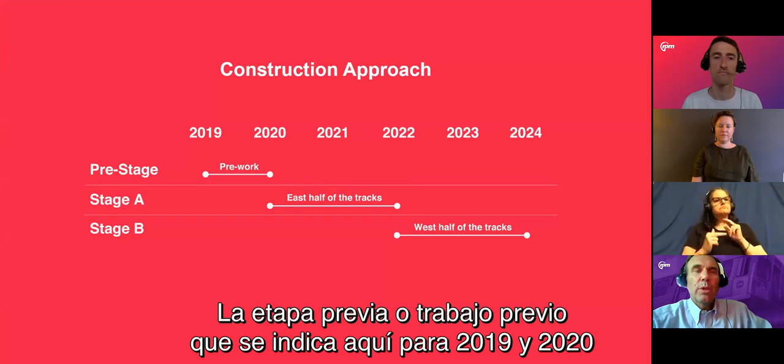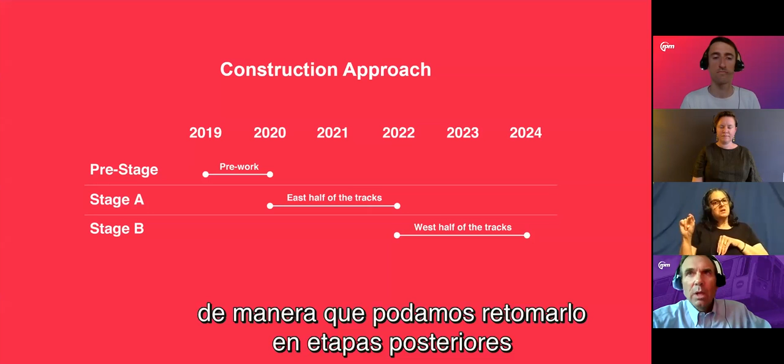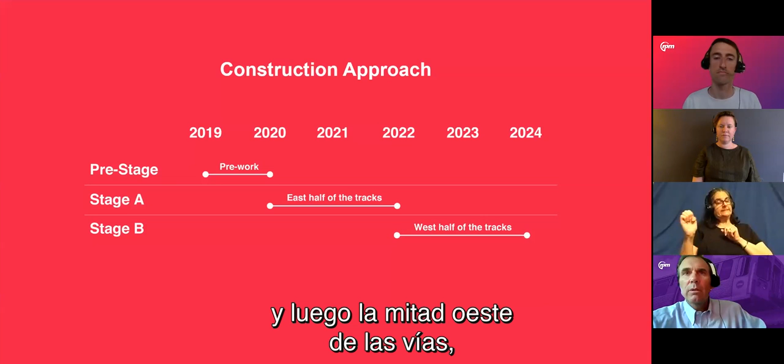Next slide, please. So construction approach and schedule. The pre-stage or pre-work indicated here for 2019 and 2020 is really to set up the tracks in such a way that we can come in two subsequent stages and build half of the new structure and stations on the east half of the tracks from 2020 through 2022, and then subsequently the west half of the tracks once the east half is done and we can run service on them.

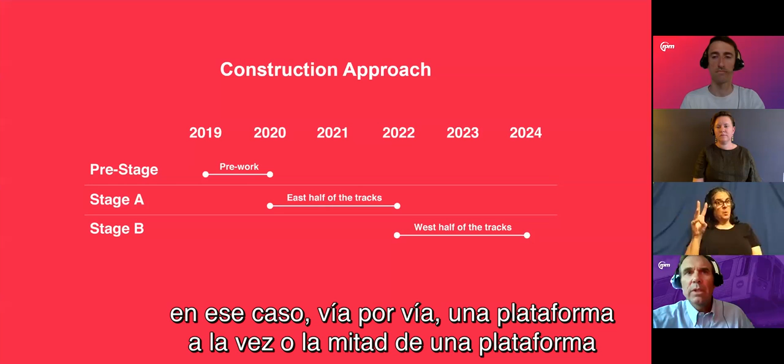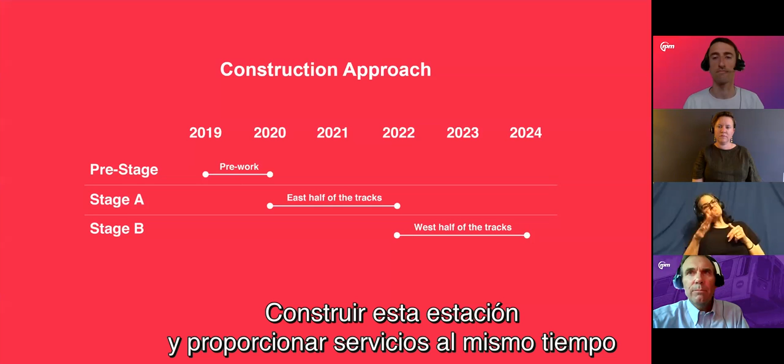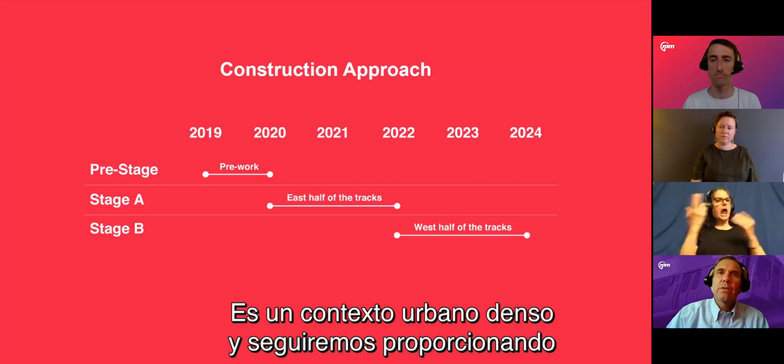So if those of you that watched Wilson noticed how we built, in that case, one track at a time, or one platform at a time, or even half a platform at a time, you'll see a similarly incremental process here. It's really to build this station while we're also providing service, which is one of the reasons for the cost of the project, and one of the reasons for the duration of this schedule. It is a dense urban context, and we will continue to provide the same level of transit service to you throughout the construction.

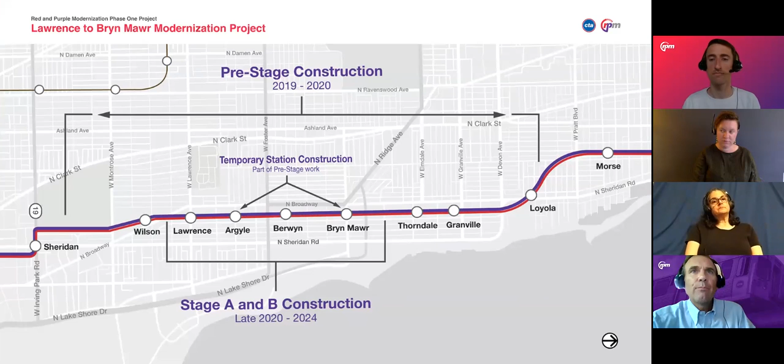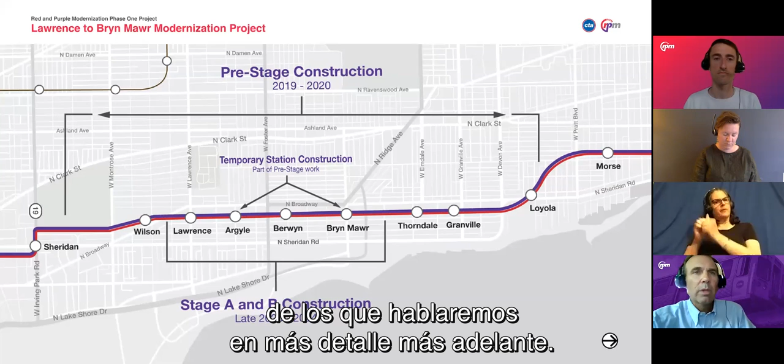If you can, please go to the next slide. So the project map. The pre-stage construction is predominantly two interlockings. One that we just got done installing at Montrose - thank you very much, Alderman Cappleman. And another that we'll be installing at Thorndale, working very closely with Alderman Osterman. It also involves some signal and systems work that I won't get into too much detail on, but all of it important so that we can move trains from one set of tracks to the other and build on the opposite side.

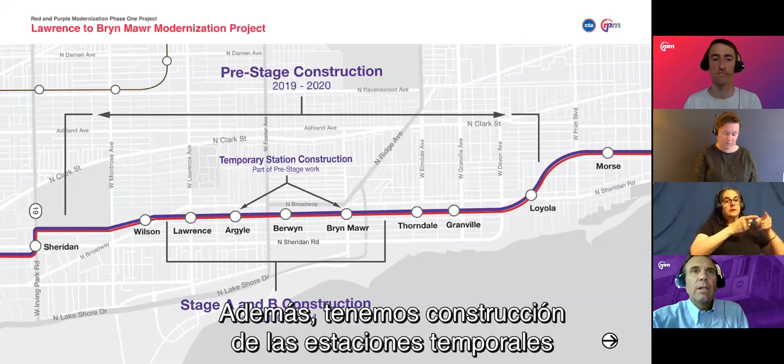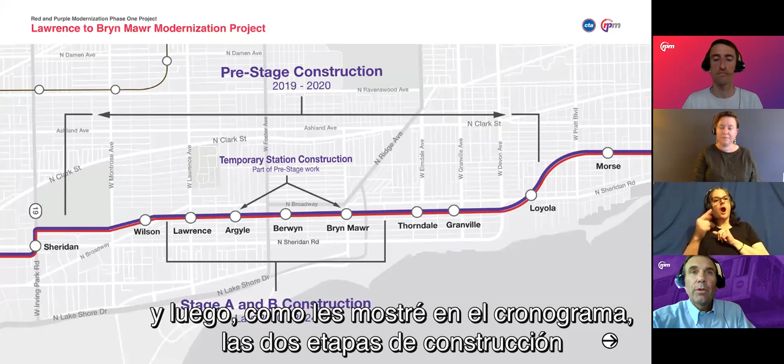In addition, we also have temporary station construction at Argyle and Bryn Mawr, and then as I showed you on the schedule before, the two stages of construction for the bridge and the stations underneath it from late 2020 to 2024. Could we go to the next slide?

So with that, for some more details on the upcoming work at Thorndale, I'd like to turn it over to Jesse. Thanks, Chris, for taking us through some of those basics. And yeah, as Chris said, Steve, you will be going through some of the upcoming construction progress and the impact. So go ahead, Steve.

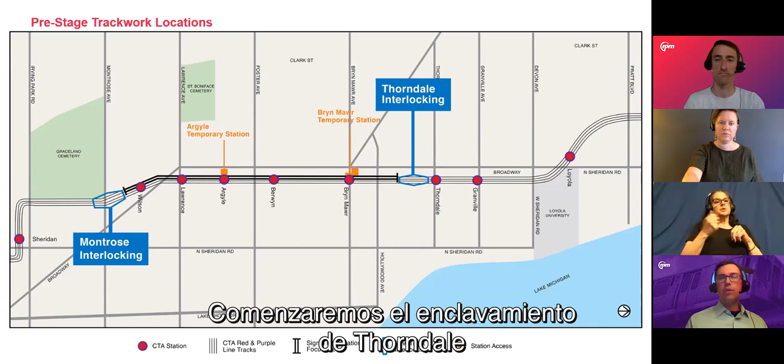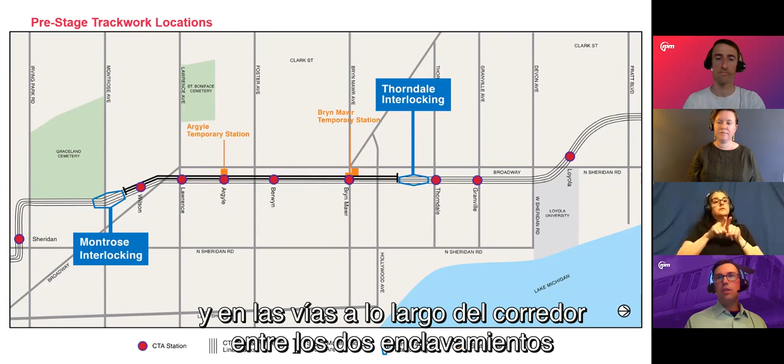We have the 2 interlockings at Montrose and Thorndale. The Montrose one, again, was completed over a series of weeks in June. And again, we're starting the Thorndale interlocking, a 4-week process, this Friday. In addition, we continue to work on other wall repairs and track work along the corridor between those 2 interlockings and the temporary stations at our temporary station entrances at Argyle and Bryn Mawr. Next slide.

We've used the term interlocking here, and I understand that's a phrase common to us in the railroad industry, but we should explain a little more. This picture shows the work underway at Montrose for the interlocking a few weeks ago. You can see from this image how the tracks, a new set of rails, is installed so that you can move from one track to the next. In addition to the rails, there's also electric power work necessary to move the trains from one track to the other, as well as the signaling infrastructure that Chris noted earlier in the presentation.

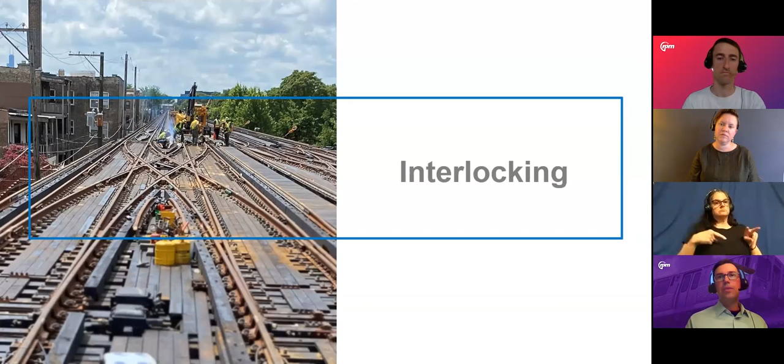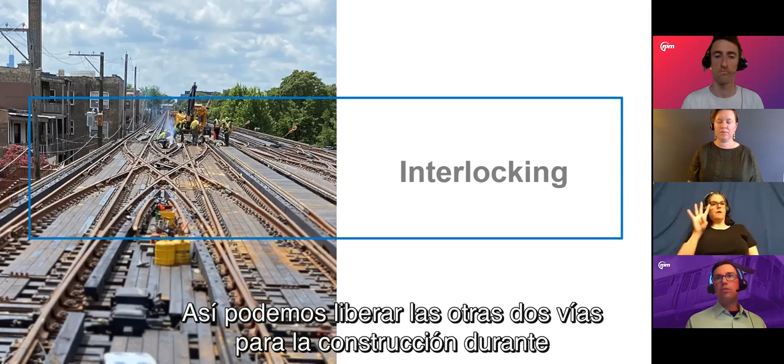So this interlocking is a series of the track infrastructure, power, and signal that allows us to move trains from one track to the next. It will allow us to combine red and purple line train services from their current 4-track corridor down to 2 tracks, so we can free up the other 2 tracks for construction during the Lawrence to Bryn Mawr modernization period. So that's why we talk about interlockings. It's a very important aspect of the preparatory work necessary to move into the next phase of construction, and that's what we're really going to focus on today under this conversation.

If you're looking for more detail, the service alerts are available on our website at transitchicago.com. You can go there and learn exactly what time everything starts and the alternative service available. But I'll walk through it again, starting this weekend. There will be station closures at Granville, Thorndale, and Bryn Mawr. During that period, there will be bus shuttles provided that will connect you from Loyola and all 3 stations that are closed to Berwyn. So you'll be able to access the red line again at Loyola and Berwyn, and the bus shuttle will provide service in between.

On Monday and the following 2 weeks, between July 20th and the 31st, there will be no Howard-bound stops at those 3 stations, Granville, Thorndale, and Bryn Mawr. So if you need to access those stations and go towards Howard or northbound, you'll have to take a southbound train to Berwyn and transfer to a northbound train to move forward.